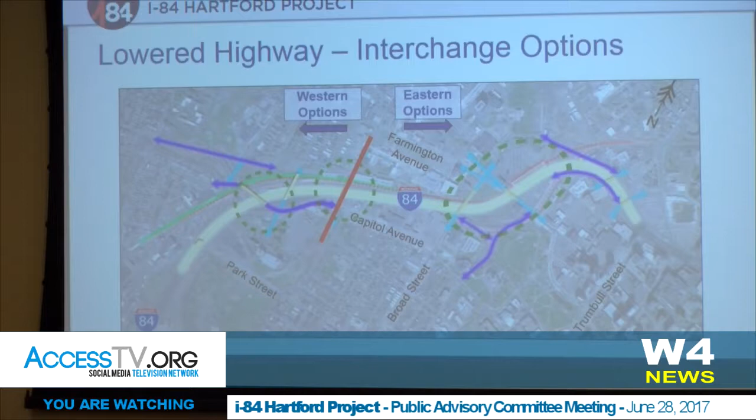So I'm going to jump into a western option here. This is the western interchange option we're looking at recommending as part of that reasonable range of alternatives. The yellow shapes indicate at-grade roadway pavement, the orange are bridge structures, and the light blue are the potential property impacts.

With Park Street here at the bottom, we've zoomed in a little bit. Sigourney Street is here towards the right of the map. Coming over Park Street, you'd have an eastbound off-ramp and an eastbound on-ramp from Laurel Street, located just south of Capitol Avenue. Capitol Avenue would be reconstructed to pass over I-84 and over the railroad, whereas today it goes underneath.

There'd be a westbound off-ramp and a westbound on-ramp coming to Capitol here, just a little bit east of Forest Street. One of the big pieces of this option is this new potential road connecting Hawthorn Street over towards West Boulevard at Sisson Avenue. That second east-west roadway is crucial to the success of this alternative, both from a traffic perspective, and from a knock-on effect where those roads are smaller, more manageable, better for bicyclists, pedestrians, and transit users.

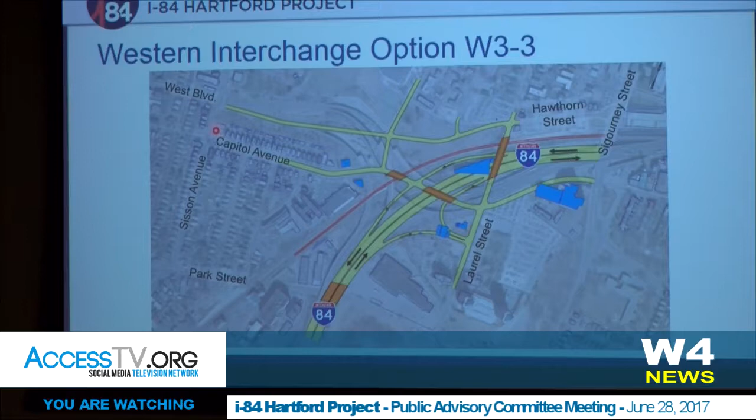I'm going to walk you through some of its characteristics and then explain some of the key differences to the other 2 options. So here's that eastbound on and westbound off-ramp at Sigourney Street, with the highway passing under Sigourney Street. The red line is the railroad where it would come off its existing alignment.

This orange here would be a sort of tunnel that would carry the railroad beneath Broad Street, Farmington and Asylum, and then the station would be located likely in this vicinity. Gina will be touching on that in the next few slides.

In terms of the interchange ramps, we'd have those Sigourney Street ramps I mentioned, and then eastbound we'd have off and on ramps from this new north-south road that would connect Capitol Avenue to Asylum, and then continue as Spruce Street with an extension beyond where Spruce currently ends at Church. We'd extend that up and around into Chapel Street South, creating a frontage road system.

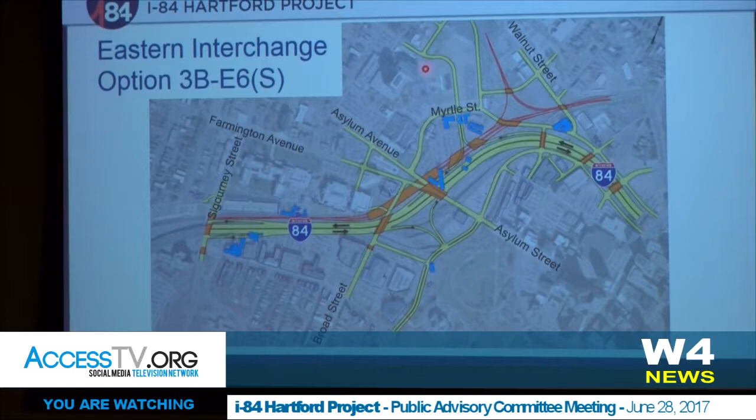So again, Christine's going to talk a little more about the DEIS schedule. Ultimately that process, looking at all those different NEPA characteristics, will help us come to what we feel will be the right conclusion as to a preferred alternative. With that, I'm going to turn you over to Gina to carry you through the station.

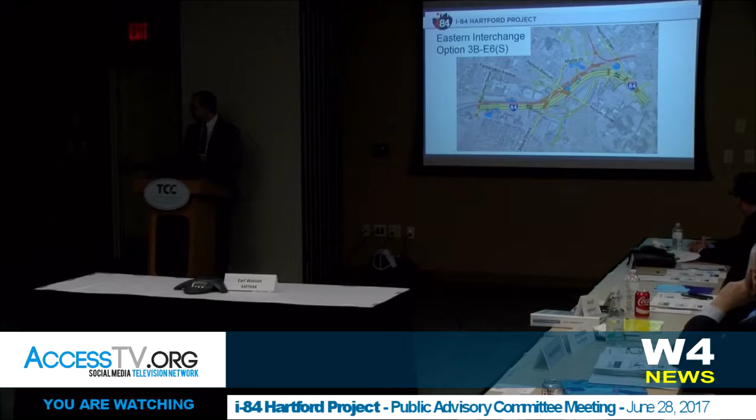Thank you. So as you're well aware, we are studying different transit station alternatives in what we're calling our multimodal station study area. This is a 20-acre site. Asylum is on the south, Cogswell is on the west, and the existing Union Station is on the east. The tracks are going to be relocated to the west about 1,000 feet, so that's the area we're looking at. It's about a 4-minute walk between the existing Union Station and the new relocated tracks to the west.

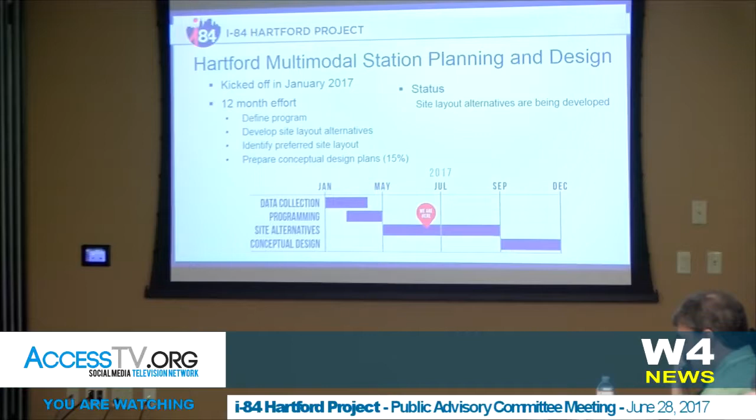We started in January. We were at the PAC meeting previously to talk about the schedule. It's a 12-month effort for what we're calling the 15% design plan, which is really about locating a station layout, not designing the building per se. So we've completed our data collection and our programming phase.

That programming phase was when we sat down with the various stakeholders and users of the station and identified what type of spaces they would need in the future for their riders, their offices, their ticket agents, and so on. So we've completed that phase, and that data is what we've used to lay out the various station alternatives on this 20-acre site.

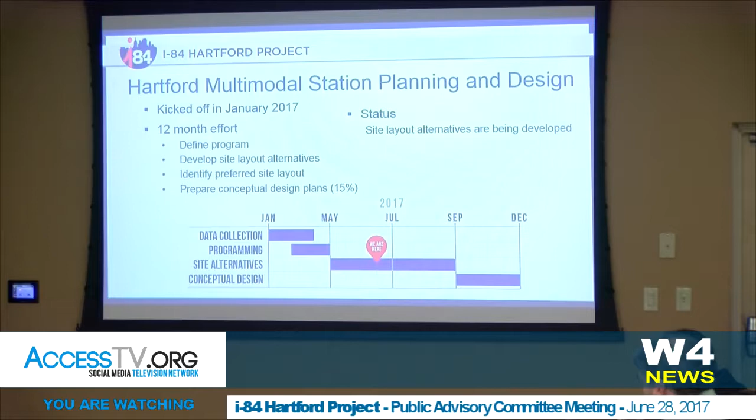We presented at the Open Planning Studio in April. We did present 4 different station alternatives. Since then we've added more, so we're now up to 7. We also presented these concepts at our Transit Technical Committee meeting, the TTC meeting, where we received input from various members of the public, stakeholders, and TTC members. We keep hearing a lot of the same recurring themes.

We hear that there's a need for a seamless connection between bus and rail. Right now, at Union Station, we have local buses stopping, Greater Hartford Transit District paratransit vehicles stopping, and intercity bus, Peter Pan and Greyhound stopping. The rail is now going to be moved 1,000 feet to the west. What do we do about the buses? We understand that there needs to be some type of connection between the bus and rail folks.

The station should act as a main regional transit center. It should also be a gateway to downtown Hartford and to the Bushnell Park area. There should be a strong pedestrian and bicycle connection. I think that's true throughout the entire project. We keep hearing that's important.

The options need to support the viability of Union Station. Union Station is a historic building, and how best can we do that given the different station layouts? Whether it supports transportation functions in the future, or it turns into something else, whatever we do needs to support the viability of Union Station.

The rail tracks will be relocated at the early part of the project. 7 to 10 years later, depending on funding and how it's built, the lowered highway alternative will be built. The track level and the lowered highway alternative are at the same level, so that's the lower level of any concept we're going to be showing.

We also have safety and security concerns that we need to worry about. Some of the concepts I'm going to show you have construction over a cap over the highway. We're in discussions right now with FHWA, FRA, and FTA about different guidelines they have about constructing transit stations and parking over highways, and what that means in terms of security and safety.

The other thing we need to worry about is access. As I said earlier, this station will be accessed by vehicles for the parking structure as well as buses. And what does that mean in terms of the street network around that?

I wanted to go a little bit over the color coding too. I think I can do this. Yes, okay. So the purple on each of the concepts represents the transit station.

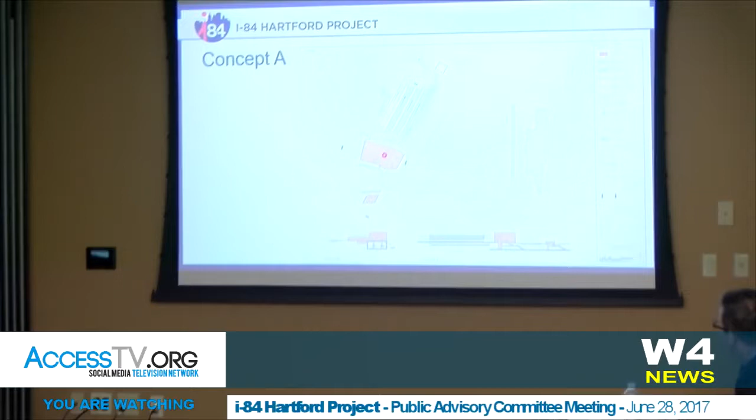The transit station is going to be built at different levels. It'll start with access at the platform level, which is at the same level as the lowered highway. In most of the concepts above that will be a concourse, and that concourse will allow passengers to get off the rail, go up about half a level, and transfer under Asylum Street to the other side of the street.

So that they can get off or cross Asylum Street to get on buses on the south side, or to get on sidewalk connections and go west and east at that point. Above that is considered level 1, and that level 1 is Asylum Street level.

Depending again on the concept and what the square footage of the station is, there'll be 2 to 3 levels above that, or 1 to 2 levels. So it'll go up to maybe a 3-level high station and parking.

Each of these concepts also show bus bays. The blue will be local bus, so that's Connecticut Transit local buses. The green to the right, if you see that in this concept, would be intercity buses - that's Peter Pan and Greyhound. And then we're also suggesting some employer shuttle buses.

That's something we're also studying, so employers can operate shuttles between the train station and their places of employment if they desire to do that in the future. Now, not every concept I'm going to show you shows the different levels, but I'll explain what's going to be on each level.

So for concept A, this is what you would consider a true multimodal station. What we're suggesting in this concept is moving all the bus facilities away from Union Station, where they currently are, to right around the train station.

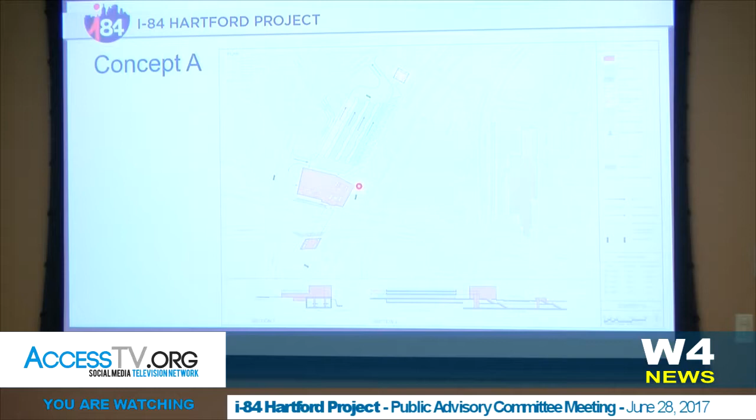Going to concept B. Concept B splits your bus facility from your rail. Again, here's this transit station. We are suggesting that the employer shuttles still stay on the west side of the lowered highway, but because the purpose of them is really to take the rail passengers to the place of employment.

But then we're suggesting that local bus and intercity bus remain near Union Station. So if passengers want to transfer between the rail and the bus, they would walk across Asylum, that 4-minute walk, and get to their bus, and then go to their place of employment downtown, or go to New York, or wherever they're going to be riding on intercity bus.

In this case, the levels are the same, where this is level 1, Asylum Street level. Above that would be the kiss and ride taxi stand within the parking. There'd be a small parking facility above here, structured parking.

Okay, this access, and I should be talking access too. We should be looking, as we're looking at these drawings, you should also notice the access. So in this case, we're just talking about employer shuttle and some parking, structured parking. There's going to be a structured parking lot above the employer shuttle.

So that would be the vehicles coming in and off of Cogswell. The other bus vehicles would be coming off of Spruce Street. In the previous example, concept A, everything comes off of Cogswell.

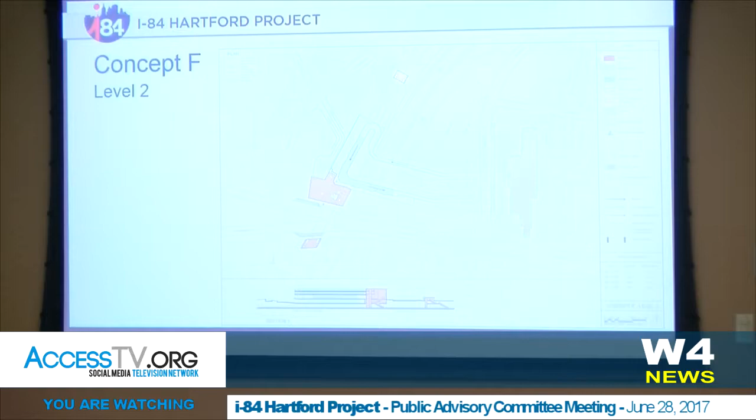And again, in this case, the access is both off of Cogswell as well off of Spruce Street, depending on which level of parking. Excuse me, can you just show us where CT Fast Track would come into this mix? Because I'm getting a little confused, how does CT Fast Track come in afterwards?

Right, for right now, CT Fast Track, for all these options except the last one I'm going to show you, they will just operate on street as they do now along Asylum. So the reason that we would have a concourse to catch buses on the south side of Asylum would be because you can catch local buses as well as CT Fast Track. So we're not anticipating CT Fast Track to be pulling into any of these station options. They would just operate how they do currently along the street once they get off the dedicated lane.

Well, where would the dedicated lane come into this picture? It doesn't, it stops, and maybe Dave or Tim, do you want to explain? At this point, it just stops south of this station area.

Yeah, we're currently evaluating CT Fast Track options and station options at the same time, and we do have various guideway options that we're evaluating now. Some of them would terminate at Road A or Bushnell Park West, which would be very, very similar to what's out there today, but it has a high cost. And we're looking at other options in between as well. So we haven't come to a conclusion on CT Fast Track yet, but we are evaluating.

But they would not be considered the same as Connecticut Transit. No, there would still be CT Fast Track buses, but it's really about where does the guideway end? Does it end exclusively at this street or that street? So we're still evaluating that. Because once you relocate the railroad, now the busway is on the other side of the railroad, so how do you get that across the railroad and then to the highway? So it's either going under the highway or going over it. So there are pluses and minuses for that.

Now, concept G, I'll give kudos to Bill if he's in the room. At our open planning studio, we got input from several people, including Bill, and his suggestion of looking south of Asylum in order to make that connection to CT Fast Track.

So phase one would occur just at the rail station. You see the purple, and these are just representative of building layouts. Any of these can be mixed and matched in terms of what the shape of the building should look like, but this is just our thought of how it could fill up the space, maybe with a plaza or whatever. So phase one would strictly be this train station.

Phase two, when the lowered highway occurs and the cap gets built over it, is when we would introduce the buses and make a connection to CT Fast Track. This is the tunnel option for CT Fast Track. The buses would come up here, and this is a CT Fast Track station.

This is Road A, correct? And then it would go out into Bushnell Park West, which is the new roadway. Cars, on the other hand, would be coming in and parking in a surface parking lot. We anticipate that we could put a green roof over this as the second level.

So really on this concept, we would not be constructing a parking structure. A parking structure could possibly be accommodated on the north side of Asylum as part of TOD development, but this would be a smaller parking lot, so that could be considered one drawback, or possibly it would serve just the train station patrons, and you could have your TOD accommodate other users of parking.

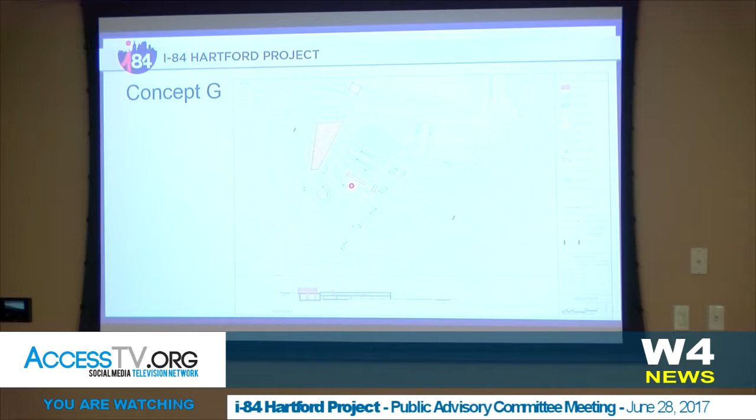Why is that one level? Is that because you can't accommodate more levels there, or? Well, what we're suggesting instead, and it could be designed all different ways, in this concept, is that there be a green roof and above for level 2.

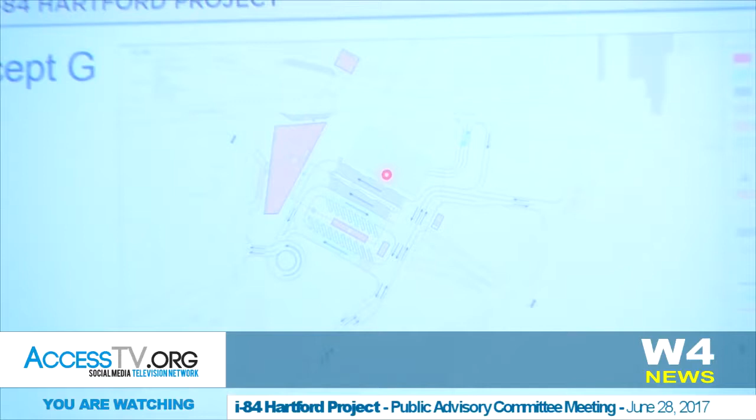If you can see, it's kind of hard to see here, but this is a green roof that we would put over this. So when you look from Bushnell Park, you would see a green roof, but then the station itself would be a couple stories high. You would view an iconic looking structure, but then have a green roof. But that's just one idea. You could also accommodate a parking structure on this side if you didn't, but that's just a different idea we had.

Where is this, Asylum Street? I'm lost, where are my bearings? Oh, okay. This is Asylum Street right here. So Union Station is there. Oh, okay, and this is the new Bushnell Park West. Yeah, I see. And Road A, and then this would be CT Fast Track coming out of the tunnel option and going on to Bushnell Park West.

This is local bus, this is intercity bus. We could accommodate shuttles. This only has a couple shuttle spaces right here, but you could accommodate more, different options.

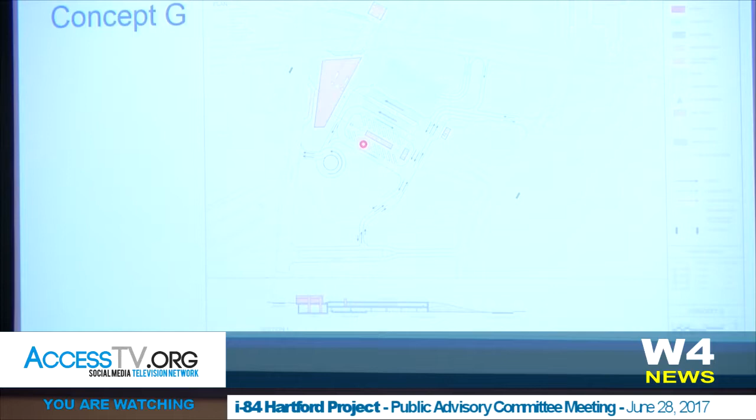So at this point, I think that was my last slide. Yes, discussion of concepts, and we do have our fine architects with us too. They can answer any questions.

Terrifying. Okay, way too much detail, presented way too fast. Possibly understanding the implications of each one. And I see no serious addressing of what happens to Asylum Street as a street. You're going to be lining it with bus stops and parking garages.

You don't have in your list of objectives at the beginning, activating Asylum Street, and that, to me, as a city dweller, is the single most important thing that needs to happen here. The second most important thing is that Union Station has to be a workable economic entity and integrated fully into Asylum Street and Asylum Avenue.

This is an engineer's dream. It's a citizen's nightmare. I think you've got to have a lot more public involvement, a lot more meetings, a lot more money. I'm pretty good usually at this visual stuff and understanding it. You just showed me what, 8? 7? 7 of 10? I couldn't, you can't differentiate among them.

Well, D, E, and F are pretty similar for sure. We did say at the earlier checklist that pedestrian and bike connections are very important, and that TOD and development along Asylum Street is very important. So any of those concepts would incorporate those ideas, which is what you just asked for. I heard them as objectives. Yeah, I didn't see them in any of the designs you showed.

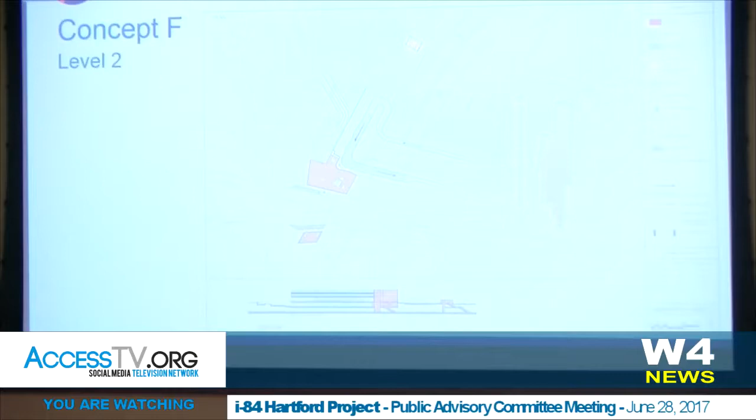How do you drive from north to south then? Where are the closest north-south entrances on either side of that? There are a couple of places for that. When we looked at the traffic, 80% was going east-west—it was only that 20% that would have to find another route. And there are two ways you can do that.

Great, because this slide doesn't show either one of them. So you'll have to trust me on this, David. There'll be other meetings where I can show you that. And if you don't, I'll find another slide. Hold on—well, I have it.

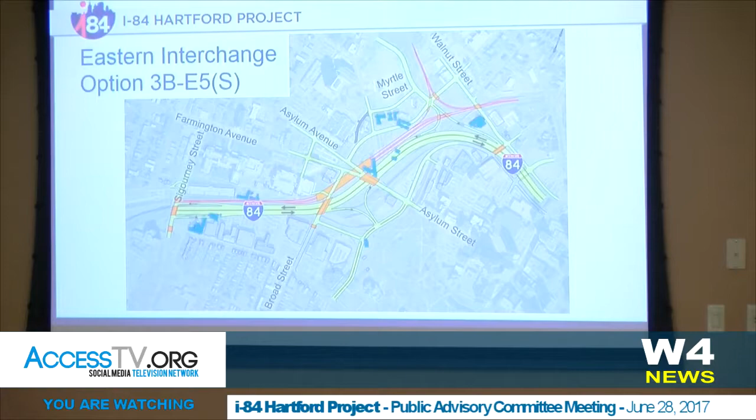Here we go, this is showing one of the eastern alternatives. There are two ways, depending on where you're coming from. From Capitol, instead of taking Broad, you can take that new road right here, which isn't there today—new access where you take a left and then a right. Also Asylum Place, right next to the Trident. It's a little bit out of the way. To make the Trident work, if you want to accommodate every single movement, there's going to be that link, bigger intersections, and more congestion. So if you take that one conflict out, it'll be a bit of an inconvenience for some cars, no question, but overall it should operate a little bit better.

So do it from my house. When I get there. You already took out Flower Street, remember? Oh, can't start with that.

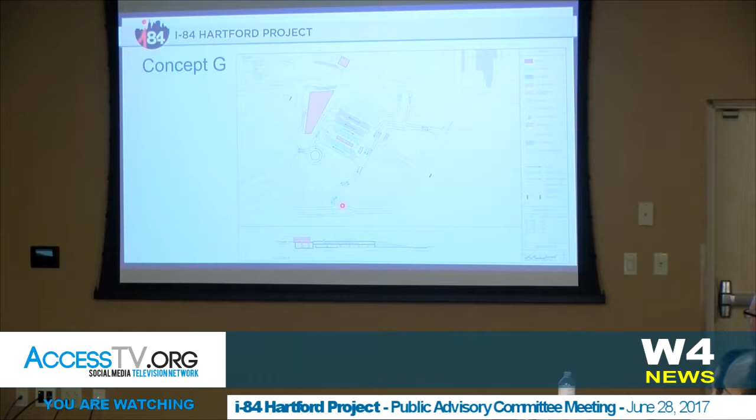You're talking about the highway option confusion. I'm talking about where the highway and fast track exits onto Asylum now. This would be west of it? Yes, west. Just trying to gather my orientation. Okay, I've got it. Thank you.

I think what we need to remember is that the transit riders, the train riders, all forms of transit people, are the customers for whatever retail goes in there. So it seems to me that impact on economic activity and retail should be a much higher priority concept in your planning for transit. In other words, every single one of these concepts, you could probably throw out half of them just on this basis. It should be evaluated early on whether it's going to support economic activity. I went through this with the goals and objectives thing, and I know that can't be among the, whatever the top level is called, the primary purpose.

Well, this is just a vote to change that, because we are at the point in this project, the location of this project, where all transportation totally merges with all the economic issues. It just seems to me that you've got to elevate the impact of the transit alternative you're considering on the economic activity that's going to occur.

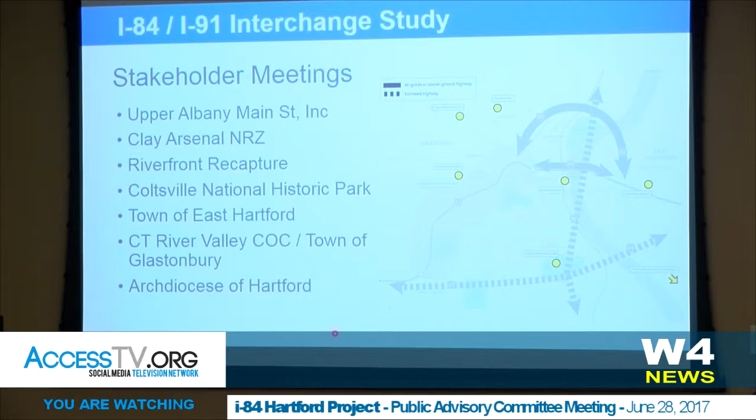We've had a number of stakeholder meetings over the past few months. We've met with Upper Albany, Main Street, Clay Arsenal, Riverfront Recapture, Coltsville National Historic Park, Town of East Hartford, etc. - just getting some feedback, or introducing the study and the concepts and getting some feedback. Nothing dramatic at this point. There is various levels of interest, and of course there's big questions about the viability of being able to afford these very bold proposals, but it's just a way to introduce the project to a number of stakeholders.

Our next steps this summer, we'll wrap up formally our needs and deficiencies analysis.

We're going to formulate a purpose and needs statement. In the fall, we'll have some preliminary results and some general concepts, more detailed than what you've seen here. We plan to have public meetings, an opportunity to continue the conversation with the public on the station and other aspects of the viaduct project. Then in 2018, we'll do our final analysis, final reporting, and a final report on the suggested path forward. Any questions on the interchange study before I turn it over to Christine?

Yes, Jackie. The funding for I-91 and I-84 is separate though. Yes, we have a limited amount of money for the interchange study. That's all we have right now is money for a study. Right, and they're separate.

Yeah, Joe. The interchange option where it could potentially be moved north, or northwest, or just northerly as you said—would that address the concerns about three through-lanes on 84 going down to two, because that interchange would be moved up prior to that congestion point? Yes, that's right. We would bypass that bottleneck, which is the existing interchange. We would create a new interchange in that northerly alignment with 91 to the north in the North Meadows area. Yeah, we bypass the bottleneck, which is key to accomplishing our goal.

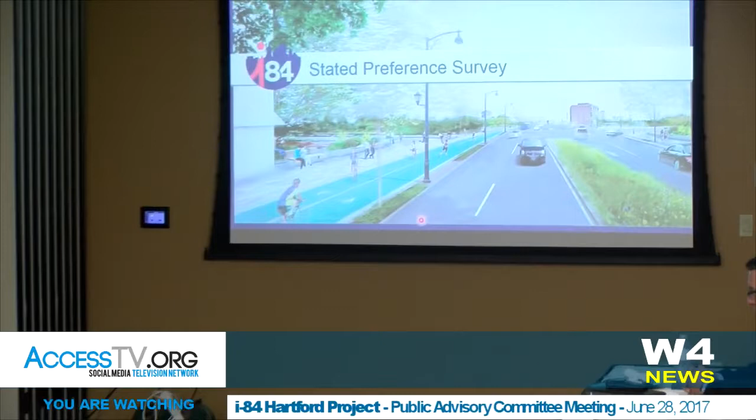This is really targeted to drivers that currently use the I-84 corridor right now, that originate, end up, or go through this area. We really want to understand what the reaction might be during different scenarios of construction. That's really why we did this. Over the next couple of years, we're going to start concentrating on how to build this. We talked a lot about some of the options before - conventional options that might take 7 to 10 years, maybe some more accelerated methods that, as Rich alluded to, pull that Band-Aid off quick. A little more pain, but there actually could be a lot reduced time frame.

So we really want to see what the reaction was, take this survey, and what we need to do. One of the big things is getting them into transit - you mentioned Connecticut Fast Track, the new rail service. We want to get as many people out of their cars, onto transit or other means as possible, and what it will take to do that. So that's really what this survey was about.

Some of the things - how many in here took it? I think there's probably, did a lot of people take it or not, Aaron? Okay, so you kind of saw the questions.

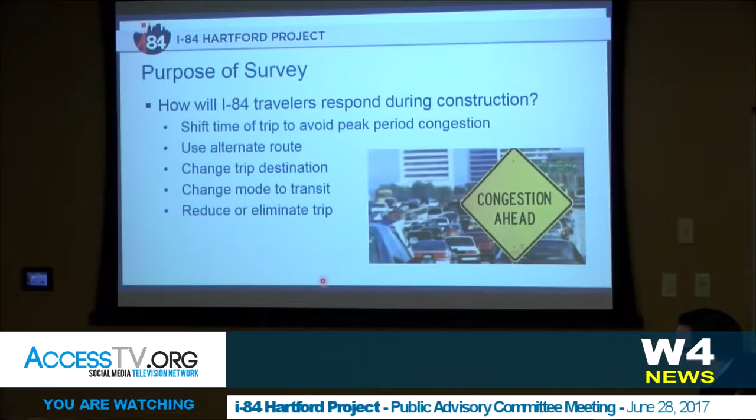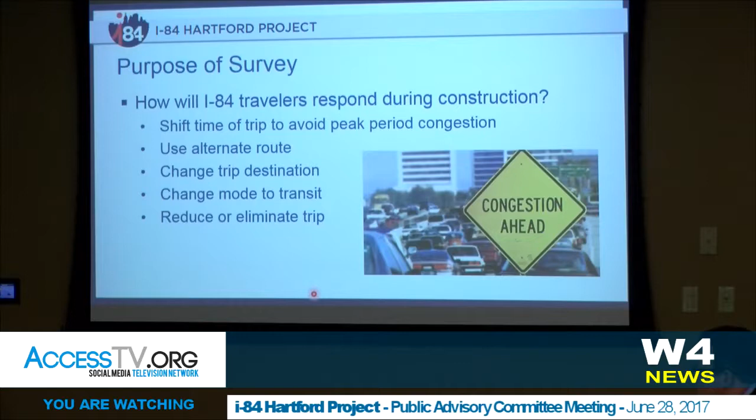They were really geared towards congestion. What will some congestion do to change your patterns? Will you switch your time or peak period? Use alternate routes? Try to change a destination - maybe your destination will take you out of this area. Big thing was the mode to transit. We really want to see what it would take to get people into transit or reduce trips. So those are really the questions we asked.

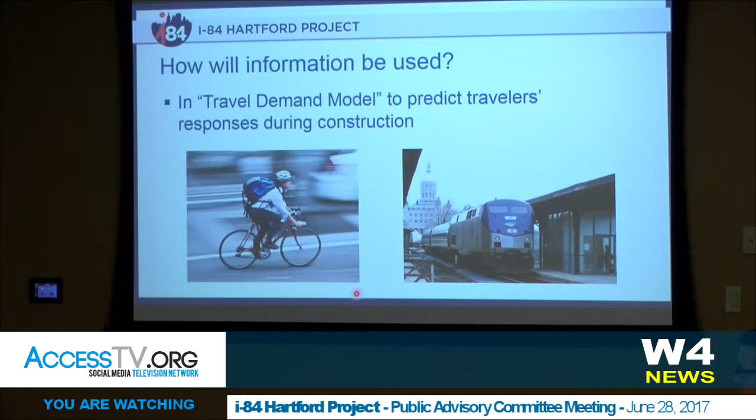So what are we going to do with it? We got a lot of data, and what this will do is help feed into our travel demand model, which is a huge model we have of all the traffic in the area. It also handles transit use, so we can look at some of the factors - based on the congestion and what we actually do to the roadway, we can predict how many people will switch to transit. So the whole thing really goes back to this model.

We did a lot of different methods to collect the data. We had direct email distribution, almost 500 people. We did a lot of in-person intercepts - I believe in a lot of the libraries along the corridor, got almost 500 there. A lot of it was through direct connections, either through our website or through some of the businesses in the area. I get to give Mike at Aetna credit - I think a good portion of this was Aetna. They did a great job, and those were a lot of the perfect people we wanted. You're right in the middle of the corridor, and a lot of them drive every day to work and back. So that was a really good selection of people we captured.

So what did we find? What did people say will make them change their drive-in mode into transit? What we found is about 28 or 30% basically said no, nothing will get them to change - I guess those are the older people, maybe, who won't get out of their car, or maybe they can't, they really only have that as a means. But 72% were positive that they would consider some form of transit. Certainly severe traffic delays is one thing. And what can we do with the transit service? Decrease cost - we had a lot of factors in the survey, even going from free during critical periods or reduced fees.

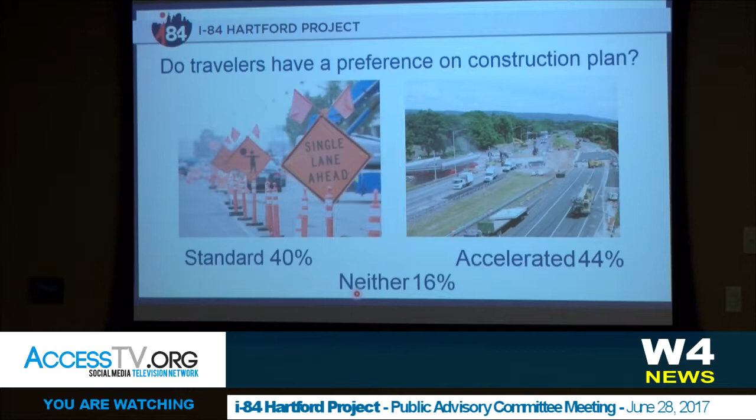I think a lot of people don't really understand. There was an explanation in the survey of what the difference is, but it's probably hard to really relate to that. Okay, any questions on the stated preference survey? And we're going to have Marcy just finish it up with the outreach.

Just a comment - wouldn't it save a lot if instead of starting up a new employee shuttle, you gave them a bus pass since it's an intermodal transportation center? Some of the employers, I think Aetna is a great one, really do encourage their employees to use transit. Some don't, but we've heard from the city that they would like that, and what we're doing is actually surveying some of the bigger businesses to see if they'd be interested in doing shuttles. So we're not sure if that's something they would want or not. We're going to be polling them within the next month or two. Well, I had a question - would they give out a bus pass instead?

I agree. The question is, in terms of transit benefits, would you give your employees transit benefits? Is that in the survey? Oh, there you go. So we do have something like that. Great, thanks Steve.

All right, question about the accelerated example - that picture, was that from a different project where they did the lane shift, where they converted southbound to northbound? Well, this one I showed in Southington, they actually shut the highway down for the weekend, I-84, so they had all the traffic get off the ramps and get back on. I think it was like a diamond interchange, so it was very easy to do. They demolished the existing spans and rolled in new superstructures and dropped them in, so Monday morning people were back driving the normal way they do. So there are different ways to do it.